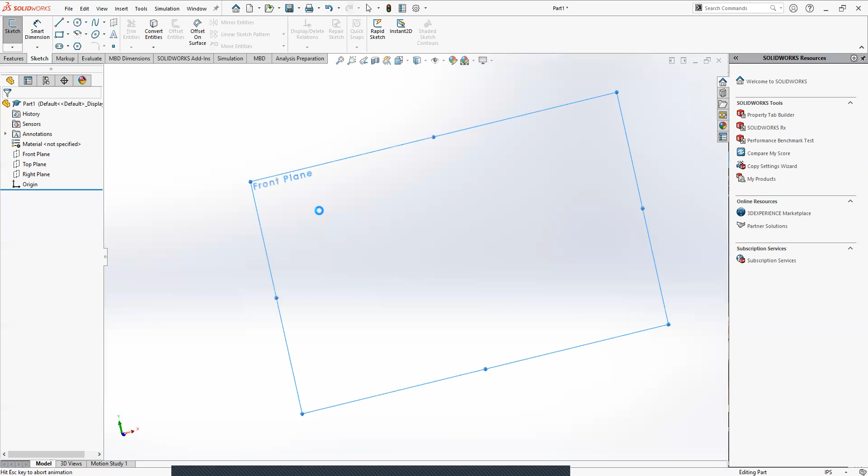Did we ever go over the polygon tool? We've never used the polygon thing yet in Sketch, I don't think. Perfect, okay, so we'll get to learn a new tool for sketching.

Once you have a new sketch, let's click on the polygon feature. It's in our little group of options for drawing. And we're just going to make a polygon.

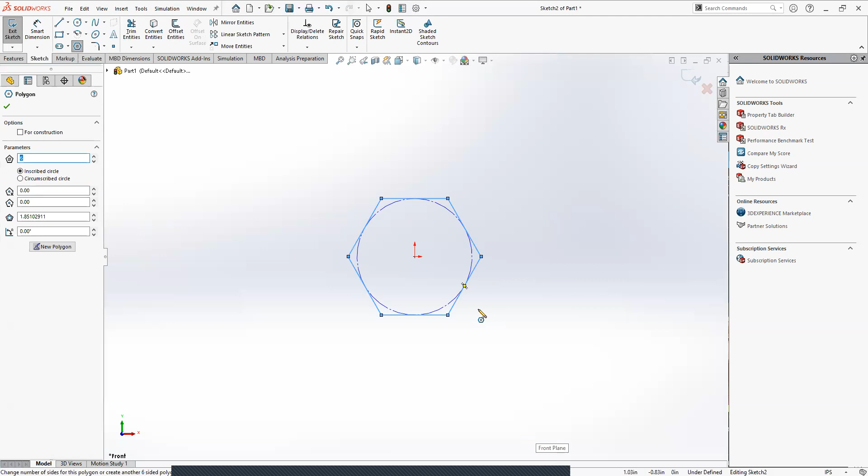So you start by clicking your origin as your center point, and then you can drag out. I want this to be hex shaft like we use in robotics, but you'll see that one of the parameters is number of sides. So I can make this 5 instead and make it a pentagon instead.

But I'm going to stick with 6 for the hexagon. Just wanted to show you that you can actually change the number of sides if you'd like. And I'm going to check.

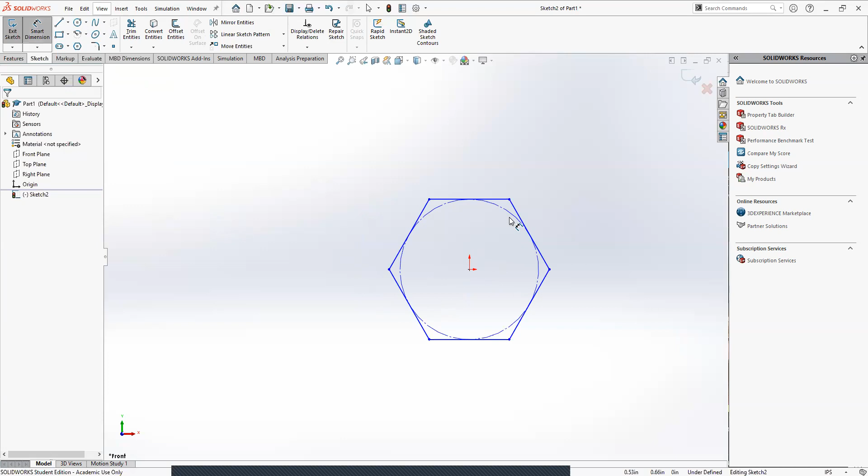After that, we're going to add some dimensions. So you have your hexagon up. Perfect. Do you know the size of the hex shaft we use for the robot?

Oh no, I don't know. You don't know? I don't have a clue, not even at all. No clue? All right, I could be wrong, if I am it'll be embarrassing, but I'm pretty sure it is half-inch diameter.

Wait, doesn't John judge you for messing up? Well, if he's watching this recording and I got this wrong, I'll probably get lit up. No, I don't know if he watches the recordings, but I know I put up one of the challenges and the diagramming for it was technically incorrect. I didn't do the dimensioning, so I didn't care, I was like whatever, it gets the point across.

It was 0.5, half-inch diameter. You can either dimension the circle here, or you could dimension from this top side to this bottom side. Oh, I just did the top and the bottom. Perfect, it does the exact same thing, because as you can see the circle is touching them, so it wouldn't actually matter.

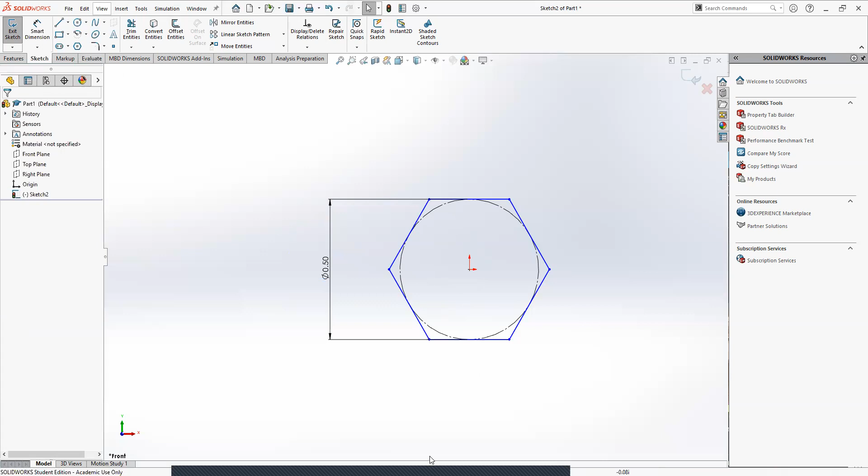Now all we need to do is fix why it's still blue - it's because we could still spin it around. To fix that, let's say we're going to make this point and the origin point, we'll make those two vertical, and now it's locked in place because we can't rotate it anymore. The top point and the origin point, we're going to make those two vertical with each other.

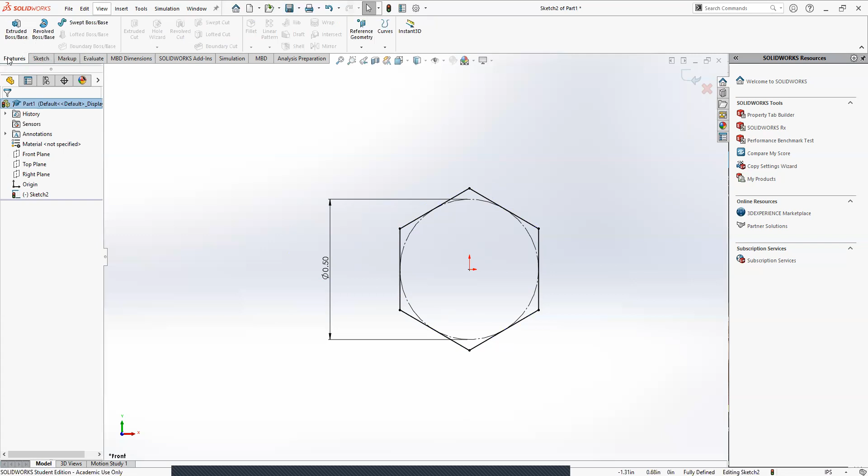Although you actually could technically pick the top and the bottom point as well if you'd like. This will basically just lock it in place. All right, so now we're going to do an extrusion for it.

What do you think is a reasonable length of hex shaft we might use? Maybe like a foot to 2 feet? A foot, yeah, let's go with a foot. 12 inches. Let's do it.

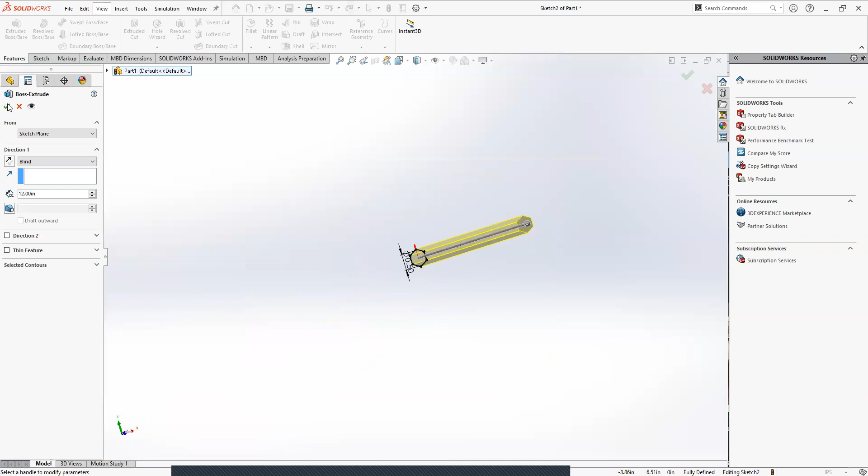Yeah, that looks pretty good. I think 0.5 was correct. That looks like a piece of hex shaft we would use.

Hold on, I gotta do the boss extrude thing. I just forgot, absolutely. Hold on.

Oh my God, are you all ready? Yeah, give me a second. Okay, sure.

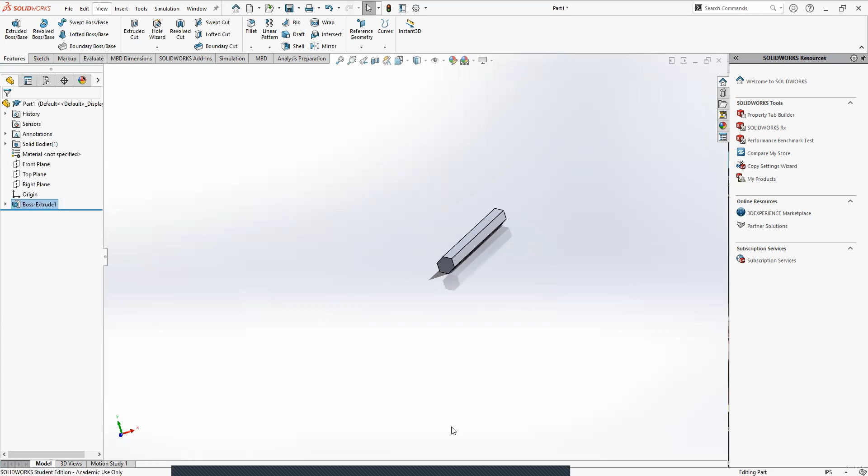Okay, so as you know, a lot of times when we're doing hex shaft, sometimes we'll drill and tap holes into the sides to put in screws, to lock it on with a washer. I don't plan on showing it this class, but there is actually a way to do tapped holes. For now we're just going to say maybe we drill the hole into both of the sides. So we'll pick a side and start a sketch on it.

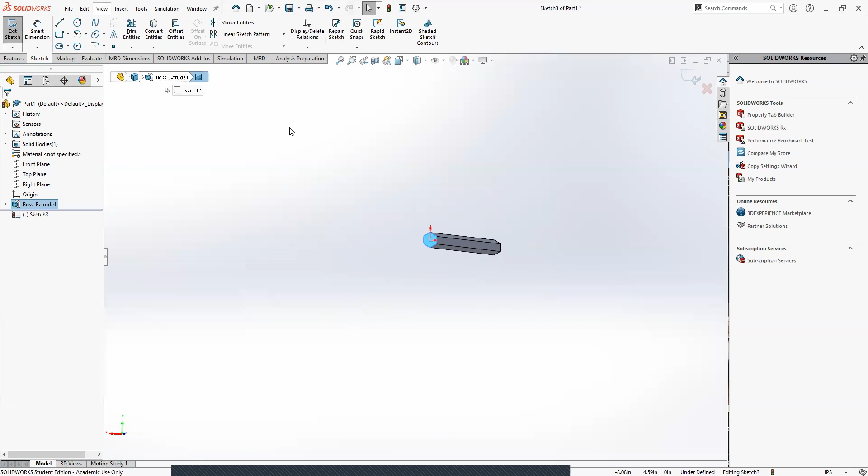Do you click the side first and then click sketch? Or click sketch and then the side? You can do it either way. I usually click the face first and then sketch, but it actually does just work either way.

Now, do you know what size hole you're supposed to drill if you want to tap with a 1/4-20 tap bit? This is a really mean question, I don't expect you to actually know this, but if you do, it'd be really cool. You know how if I drill a hole to tap a 1/4-20 screw, it would be just too small, because then we tap it and cut the threads, right?

Sometimes we'll drill a hole and then tap it to make threads. Do you know what I'm talking about, or no? If not, I can explain it a bit more. Wait, can you explain it actually?

Sure. So let's say I wanted to put a screw into one of these faces of the shaft, just to maybe put a washer on it or something, to hold stuff on. The first step is I would need to drill a hole for it. After that, you know how we have the little tap bits? They have little threads on the outside and you twist them into the hole to cut threads.

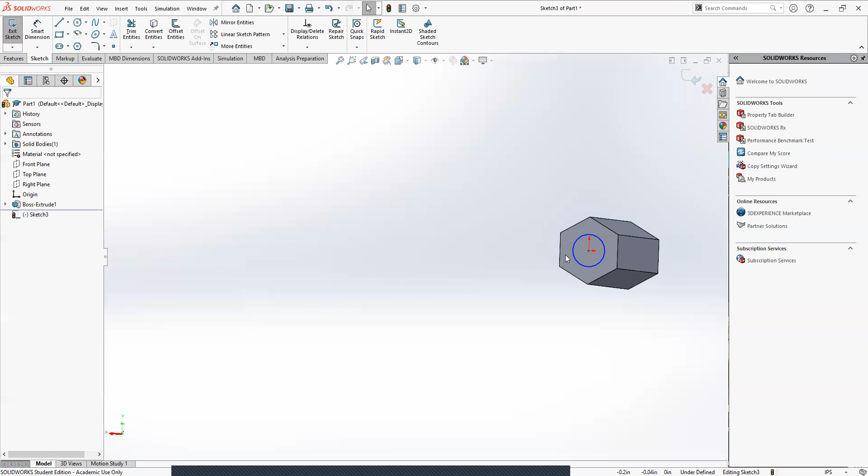Did you ever get to do that, or no? No, I don't know what that is, if I'm being honest. Oh, okay, you might just not have been around when we were showing people that. It's okay, don't worry about it.

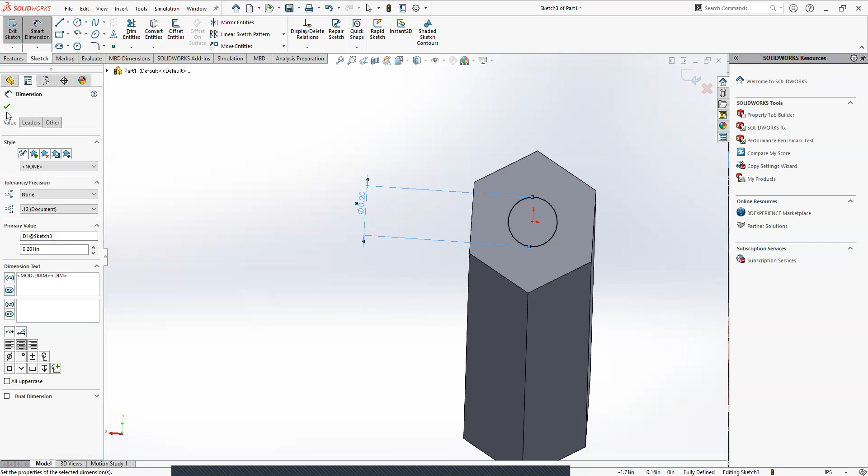But it's something we do. The answer to this little quiz question, for anyone watching online, is normally your tap drill size is going to be 0.201 inches. So if you want to make that circle 0.201, or just 0.2, whatever you'd like. That was meant to just be a little quiz question, I was curious if you'd know, but it's all right, don't worry about it. Just make that circle and then we'll make that a cut.

How deep do you want the cut to be? We don't want it to go all the way through, because this is meant to just be for a smaller bolt. What do you think? Oh, hold on, I'm still making the circle. All right, sorry for rushing you. Just let me know when it's okay.

You did it 0.2? Yep, 0.2. I put 0.201 because that's the exact size, but 0.2 will work just fine. Actually, I'll just change mine to 0.2, that's a nice round number. We'll do that. John gets angry at me, he can get angry.

How deep do you think this hole should be? Because we want to have one on each side, and this should be big enough for, I don't know, a small bolt. How deep do you think would be reasonable? Oh boy.

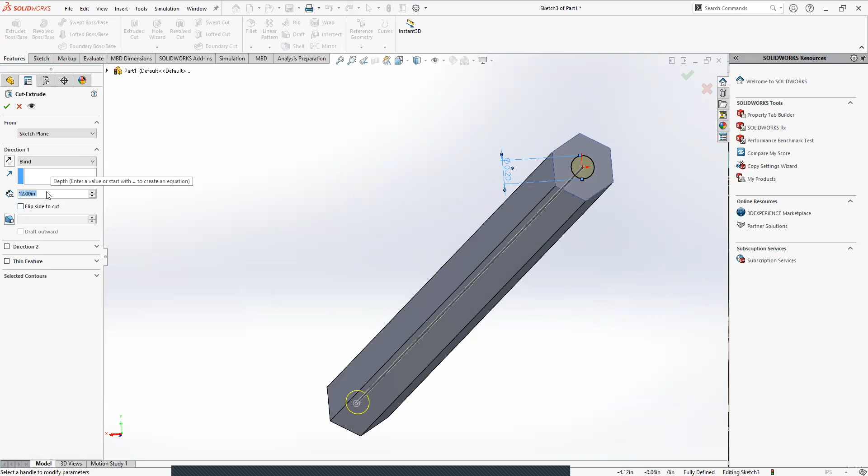We don't want to go all the way through. I don't know how long it is - wait, it's 12 inches, a 12-inch beam. We want a small hole on this side and a small hole on that side, deep enough to get a screw in, but not too deep, because drilling into the material makes it weaker. I don't know, like half an inch?

Half an inch, sure, let's see how that looks and determine if we like it. Yeah, I don't see anything wrong with that. Oh wait, no, I meant an inch. I meant an inch, yes. I think an inch is definitely good, that's a decent distance. Although honestly, I meant to say an inch. I think half an inch could work too, it really depends on what you're trying to do. But I think half an inch to an inch, somewhere in that range, is probably good.

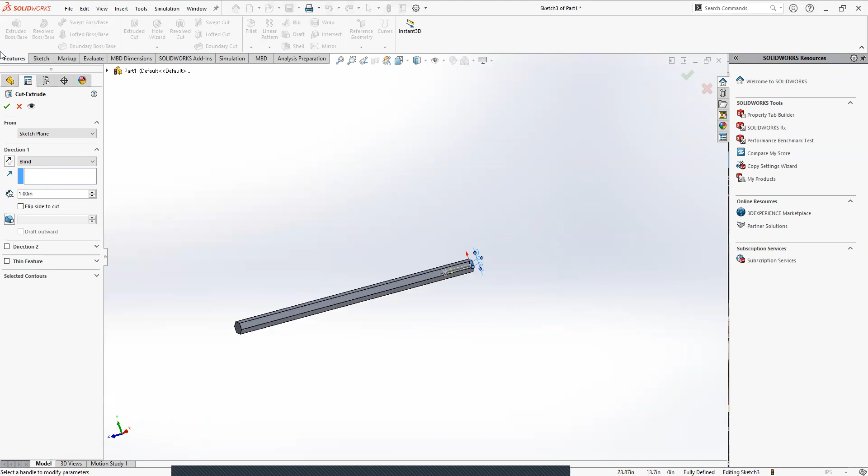Cool, all right, so we'll do an inch on that side.

Now we also want a hole on the other side. I'm going to show you a quick trick where we can reuse this hole and put it on the other side. I showed you guys how to do the mirroring, right? Yeah, I think you did. Do you want to copy it that way or learn a new way? It's up to you, we can either practice the mirroring or... it doesn't matter to me. All right, let's do the new way, because if we wanted to redo the mirror, we could just check the last video. You can always check your parts - those are good notes.

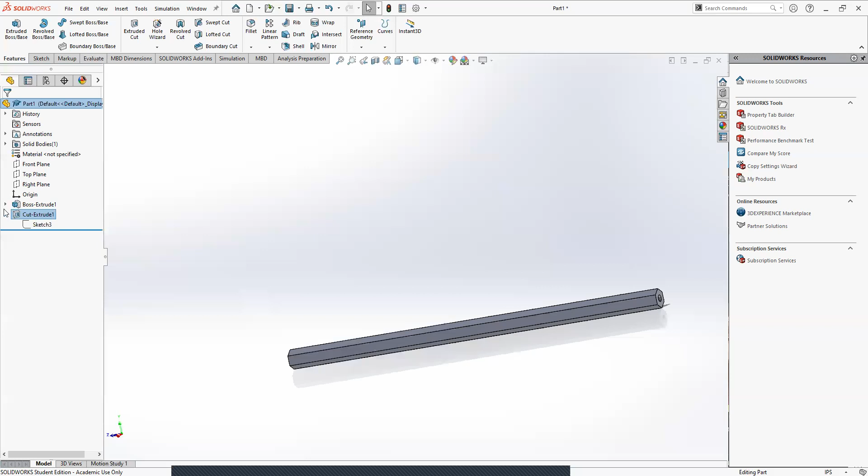So one thing we can do is use this drop down on the cut we just made - we can still see our sketch, right? Which is our little circle here. Now here's what we're going to do: we're going to select that sketch, have it highlighted, and click extruded cut again. Don't worry, it's not crazy.

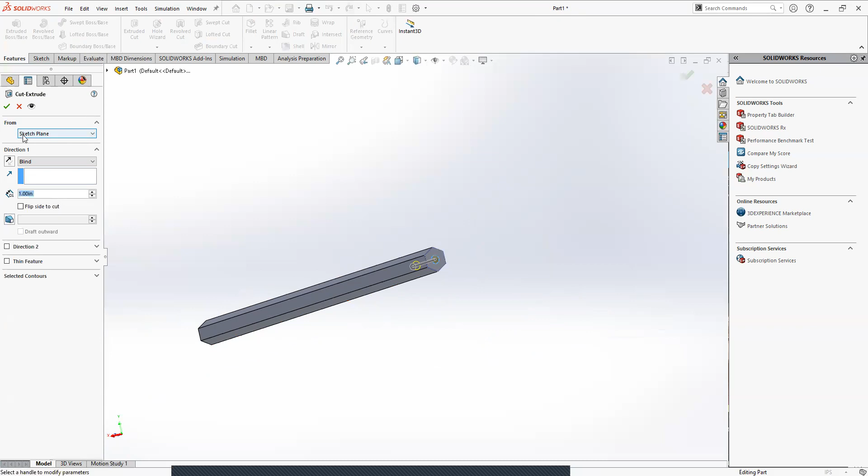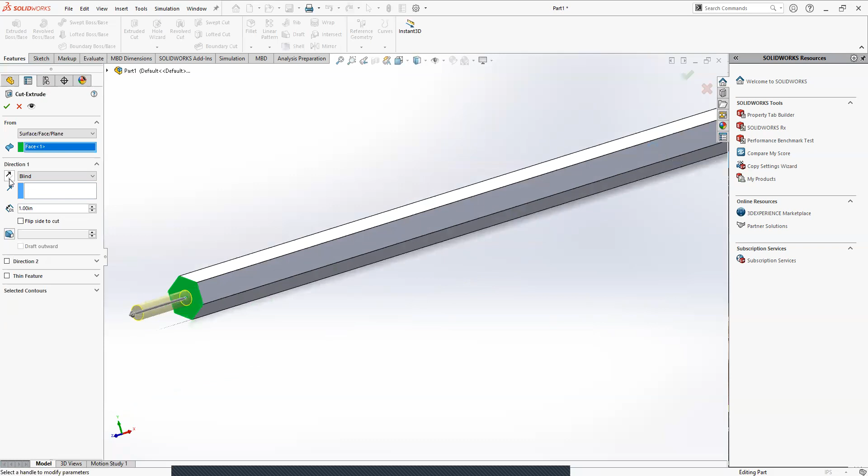Once you do that, notice there's a 'from' option up here, and it defaults to starting from the sketch plane - this is where we're drawing, so it starts there. But we don't have to have it start there. If we select surface slash face slash plane, we can select a different spot for it to start. So I can have it start on this side instead. Now if I just flip my direction here, it's a hole on the other side going into the rod.

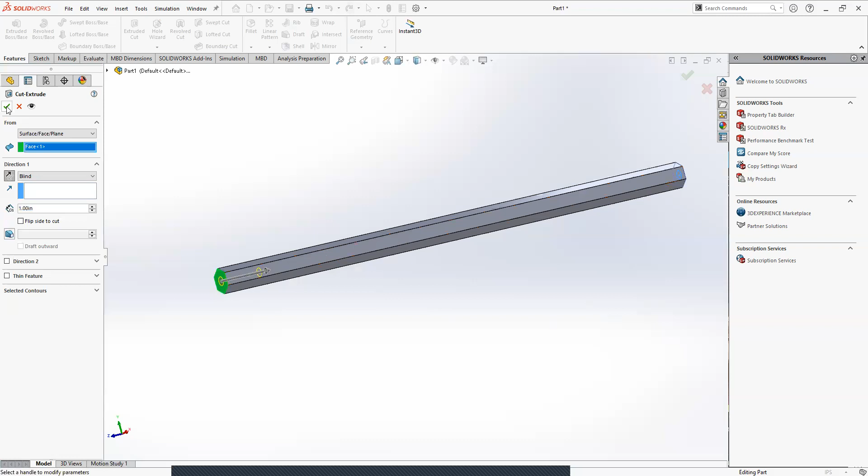Did you follow that? Hold on, I can do that again. Yeah, I did follow, I just forgot how to flip to the right. Oh never mind, just click those arrows. Okay, I got it. That's another thing you can do if you don't want to make a new sketch but also don't want to set up any reference geometry - a cool little way to do it. Yeah, that's pretty easy, you can reuse your sketches, which can actually be kind of useful sometimes.

All right, and that's honestly all I wanted to do for our part, so I'm just going to save this.

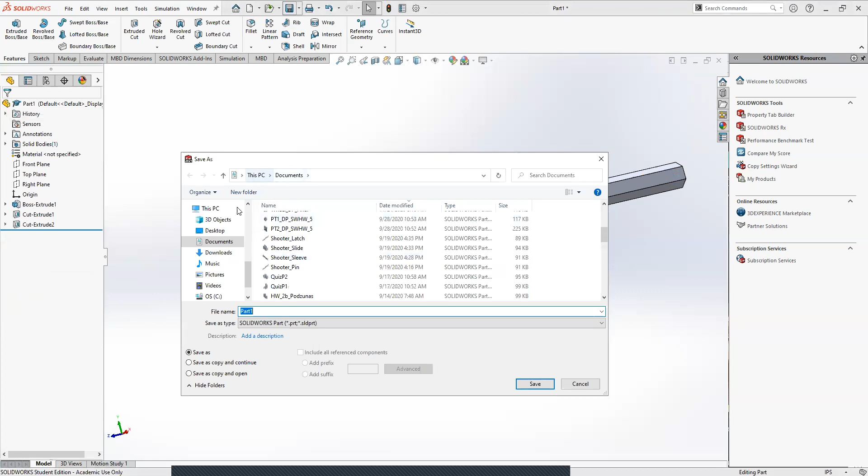Class notes - that would be, this is lesson 8. We're on lesson 8 already, this is crazy. I think by contract I only have 8 more, or 2 more lessons.

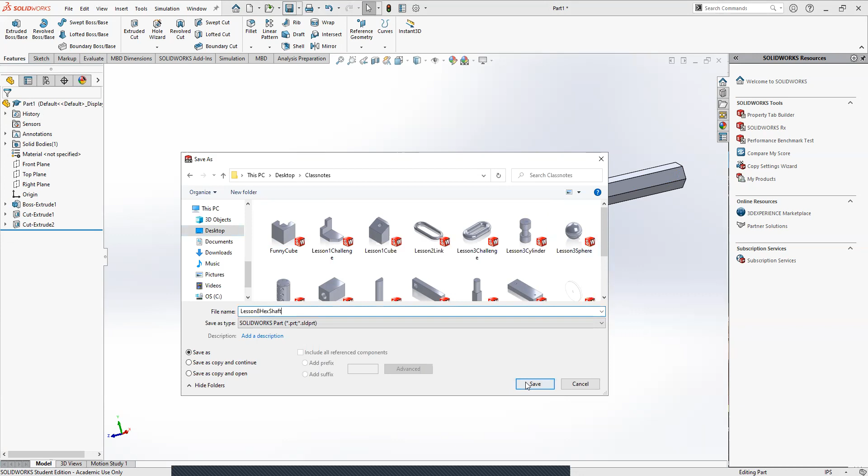Oh really? Yeah. So my plan right now is this lesson will finish this part and the drawing. Then next lesson I'd like to cover basic drawings as far as assemblies, like how to make a drawing to show someone how to put something together - and we can use the assembly we did last class for that. Then for the last one, I'll either talk to John about doing a drawing session, or I might...

Or if he wants to do that a separate time as his own thing, we might just do a more in-depth dive on some parts, because there's a few more features I haven't taught you guys about, like Hole Wizard, which is really cool, or Swept Boss and Base. I'll see, the last one's kind of up in the air as far as whether John's teaching it, or maybe I'll do a session on some really cool drawing tricks I haven't shown yet. We'll see, not sure yet. But yeah, we're just gonna save this part and then make a new part.

Or not a new part. We're gonna make, if you go up to this little paper icon, it says make drawing from part slash assembly. Go to the paper up there, there's a little paper that's folded. If you click the drop down, there's an option to make drawing from part and assembly. We want to make a drawing from this part, so let's click on that.

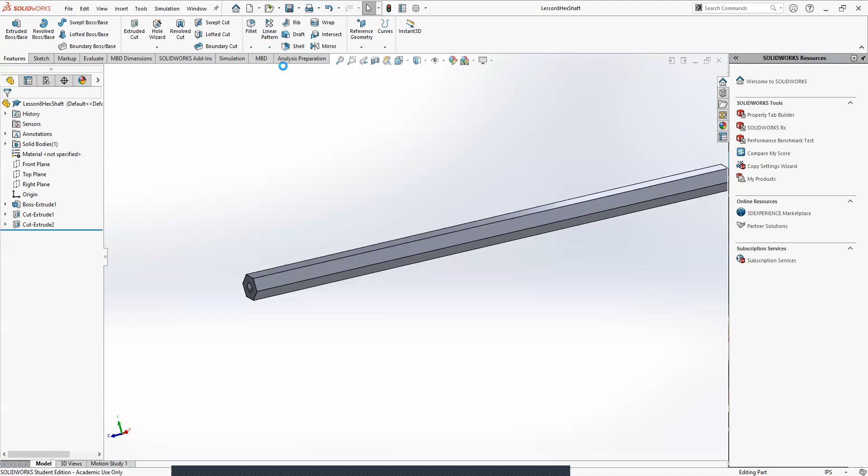And let's do a B-sized drawing paper this time. So we'll do B ANSI landscape. Okay, hit OK.

As you can see, because we told it that we wanted to start with our part on the right side, it has different views that we can drag onto our drawing sheet. I'm going to start with the front view of it, drop that down. All right, and then, I'm only going to do, or yeah let's also do, hold on, I'm going to delete all this, I'm going to redo this.

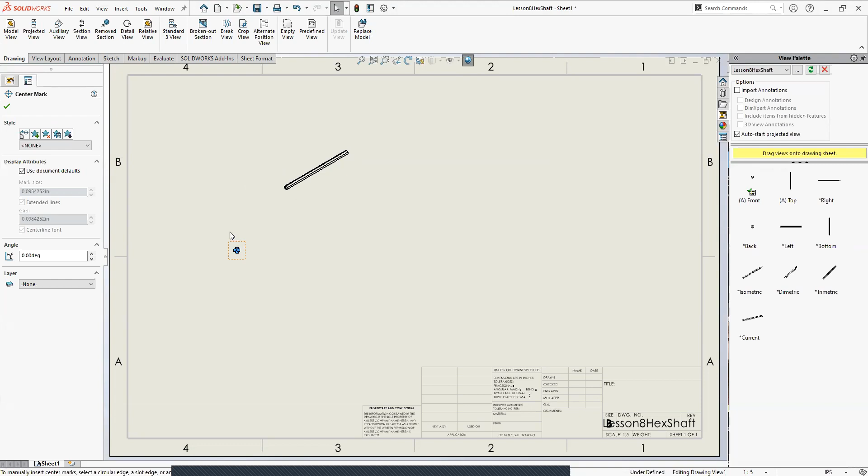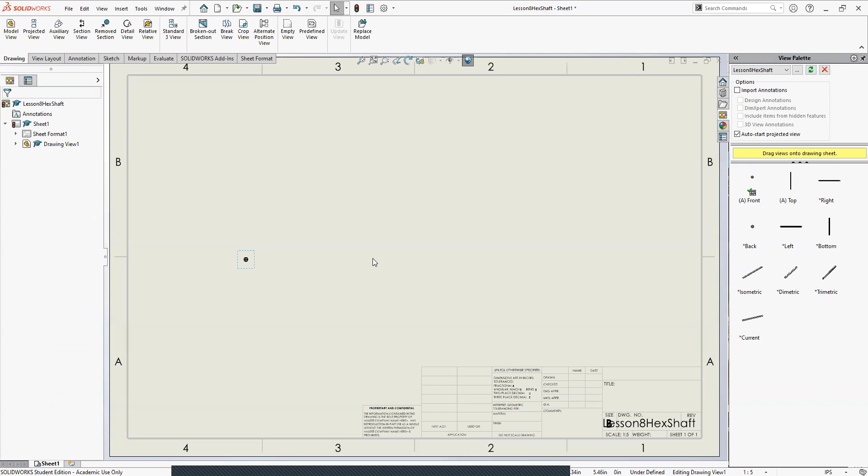Just for simplicity's sake, so what we can do is we could start with the front one, right? And now what we could do is, yeah, my thing on the side like went away. It vanished. Okay, I tried to bring it to the thing, click on it, and then it just vanished. Totally fine, all right, so let's do it the normal way then.

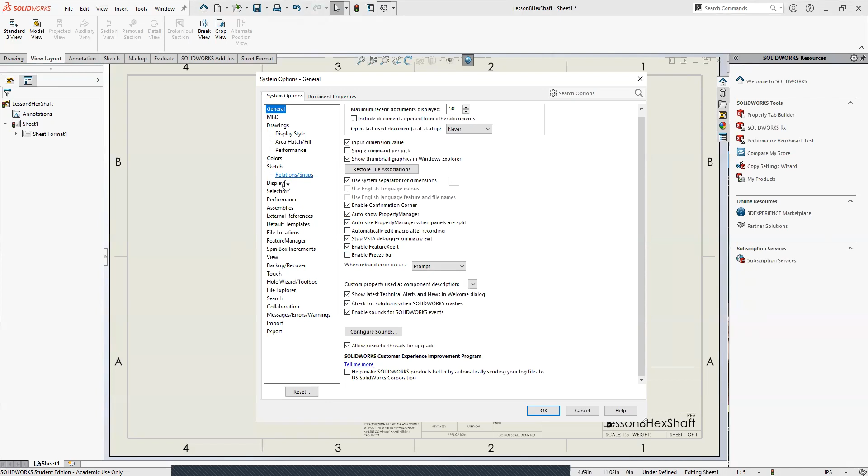So what we'll do is we'll do drawing. Oh I'm sorry, because you don't have the view layout tab, right? Nope. Hold on, I wanna just do a quick look into if I know how to. Yeah, I am unfortunately not immediately sure on how to do that.

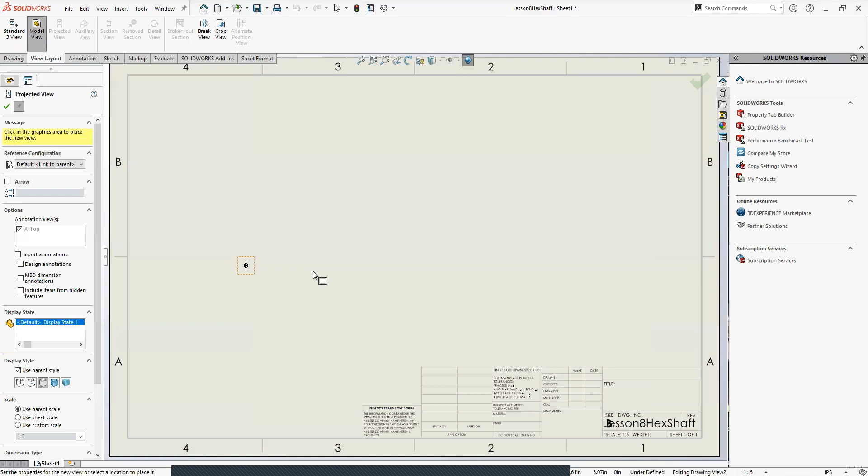But the other way we can do it is we can go to Insert, Drawing View, Model, and do it that way. Then we'll click on the part we want, which is in our case the hex shaft. I'll do a front view, and then if I just don't exit out yet, don't hit escape, I can drag to the right to make a side view, and I'll drag diagonally to kind of make an isometric view. And then I'll hit escape to kind of escape out of it. Let me know once you have that all set.

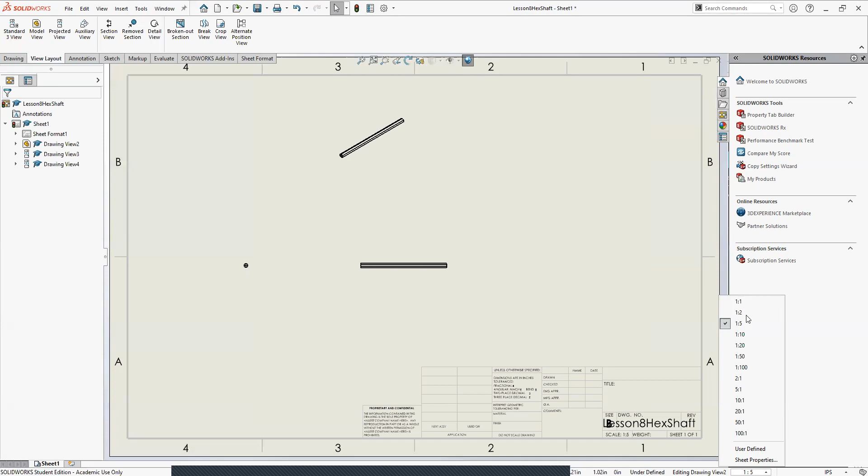All right, I'm good. Okay, and you can see right now it's scaling at 1 to 5. I want to see how it looks if I scale it to 1 to 1. So down in this bottom right area, I'm going to click on it and change it from 1 to 5 to 1 to 1. As you can see, it's, where? Right down here, I don't know if you can see my mouse, but kind of bottom right area. You'll see something where it's like, oh yeah, it'll kind of give you like a ratio. Wow, so I changed it to 1 to 1.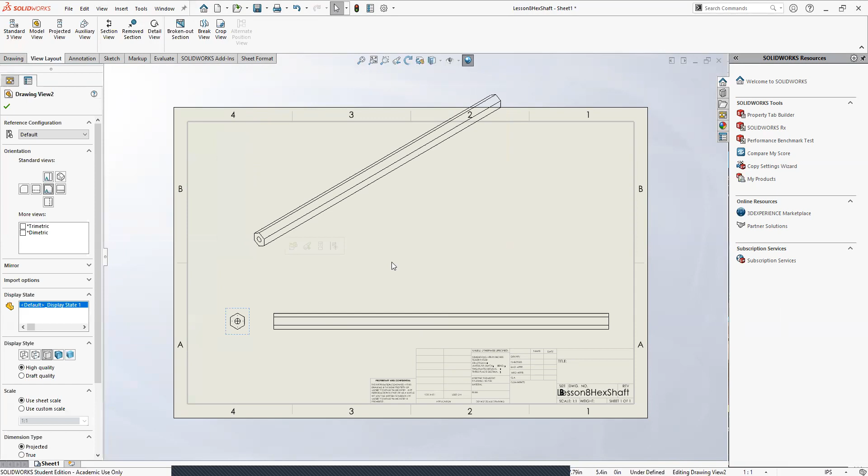But as you can see, I mean it does kind of work. And one thing to note from my experience, this isometric view, it's usually okay if you shrink that down a little bit compared to the other two. So like these, you want to have the same scale. Like all of your normal views, you want to have the same scale. Like if this is 1 to 1, this should also be 1 to 1, and any other view from it should also be 1 to 1. The only exception is your isometric views. Those you can set to something different.

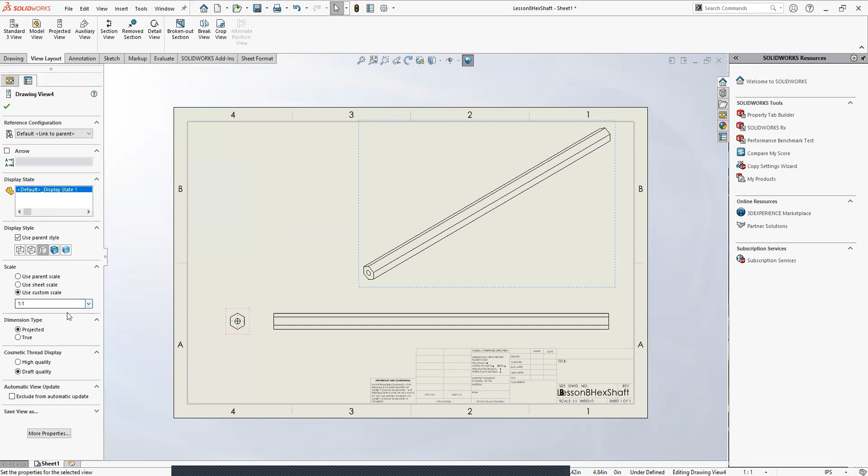So I'm going to click on it, and there's an option for scale. I'm going to choose use custom scale, and instead of 1 to 1, I might make it like 1 to 2, and then kind of just put it up in my corner over here. Because the reason why you can do that is your isometric, it isn't really there for any dimensions or anything like that, it's really only there just as clarification, I guess, just so you can kind of see the whole thing. Yeah, exactly.

So we're able to shrink it down if we want, which I'm going to do. So let's do some stuff.

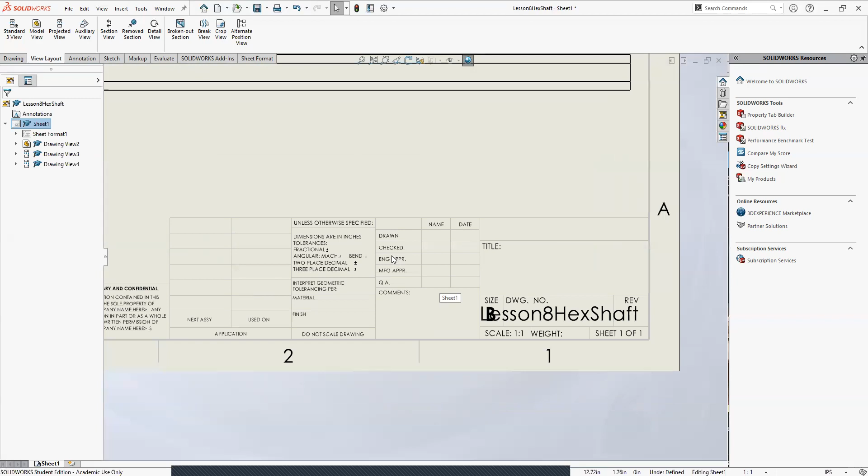First off, here's a good example of when notes can be useful. So we haven't really discussed this box area down here. Now, a lot of companies I've worked at will have their own format for this box, so I don't really use this one much. But essentially what this is useful for is just giving some more information, like drawn, checked, engineering approval, manufacturing approval, quality assurance. These won't really apply to us.

This is if you're working at a company and you need a bunch of approvals. Maybe someone checks it before it gets sent to getting machined, like maybe John might check it. But in general, we probably won't use these boxes too much. It might be nice to put your name here.

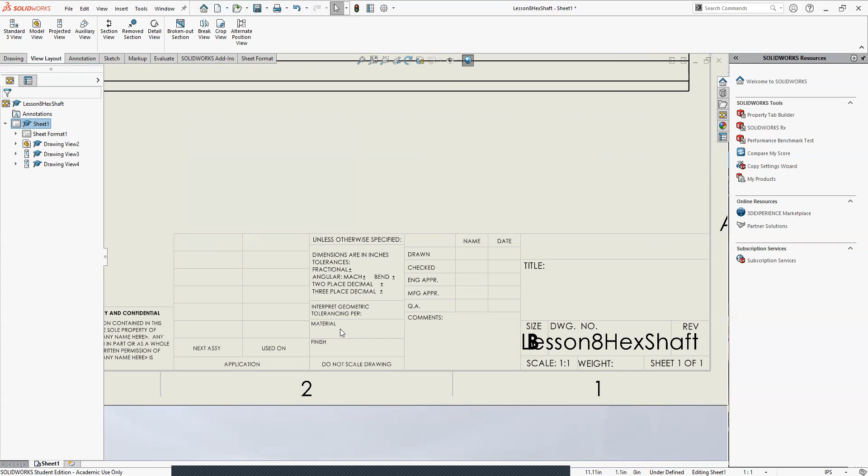Materials, kind of important. We mostly work with aluminum, right? But it can be important, especially if you want something that's not aluminum, just to let people know, hey, here's what material I want.

I don't really plan on talking about tolerances, I'll be honest. I think it's a little bit beyond what we'll really need to do in robotics, because unless John's making the part, I don't think we can really expect super tight tolerances, just because it can be kind of difficult, especially with the equipment we have. So I'm probably not going to cover tolerances.

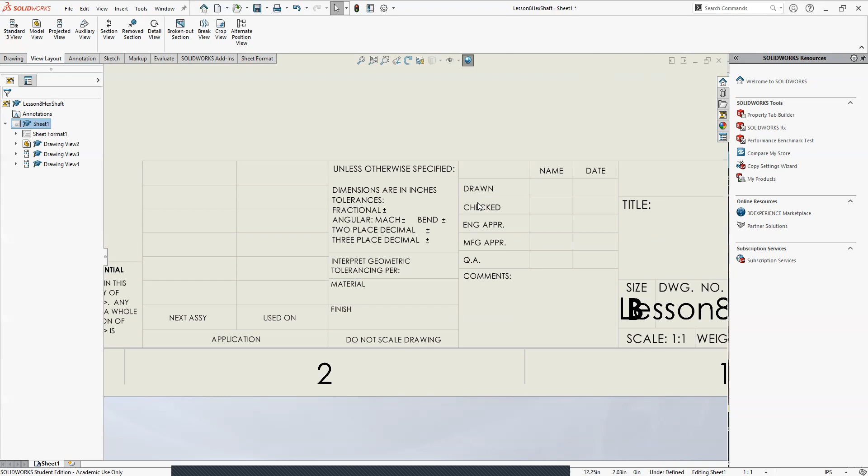I'll let John know about that, so when he's doing his drawing thing, if he wants to teach you guys, he can. But I don't think it's super relevant to a lot of the work we do on the team. I think it's a useful skill, but I'm not very good at it, to be completely honest. I know the basics, but between me not being an expert in it, and I'm not sure if you guys would really need to use it for robotics, I'm probably not going to cover it, but it is a useful thing.

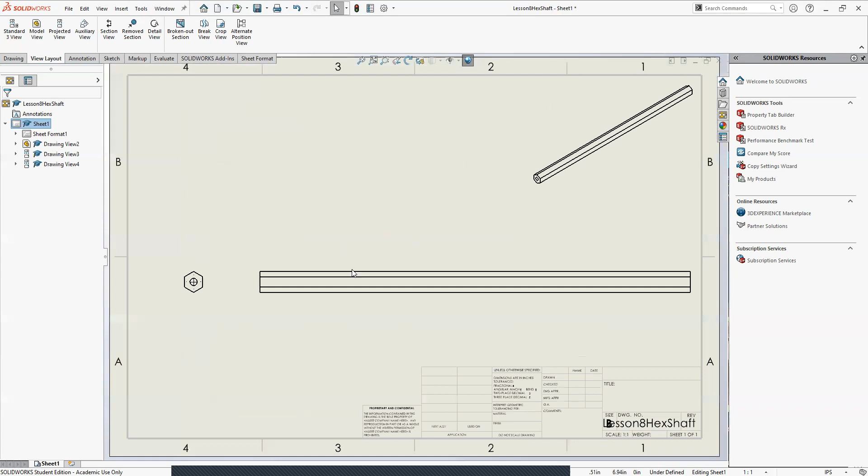So here's kind of a decent example of when you might want to use notes. If I go over to annotation, I could do a note, maybe pointing to here, like my piece, and I might just say, hey, this is 1/2 inch.

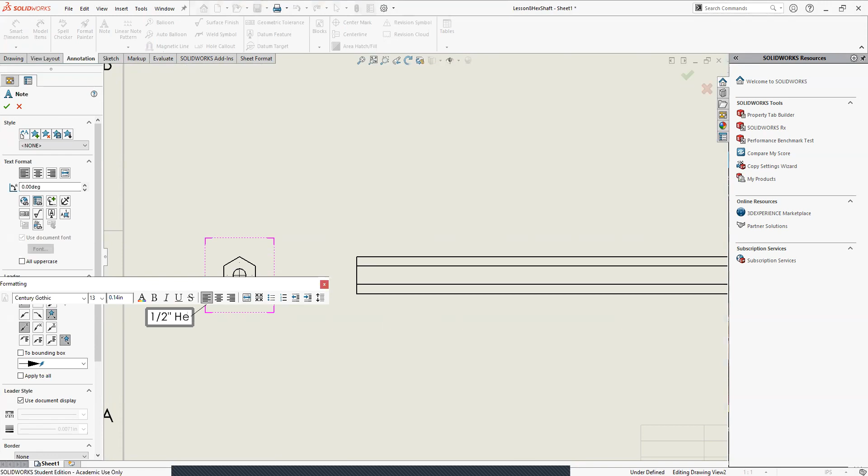And then inch is 2 apostrophes, hex shaft. I might just say that because in our shop, if I wanted someone to make this part, I wouldn't be expecting them to make the hex shaft, right? I wouldn't be like, oh, take this cylindrical rod and turn it into a hex shaft. No, we're probably starting with hex shafts.

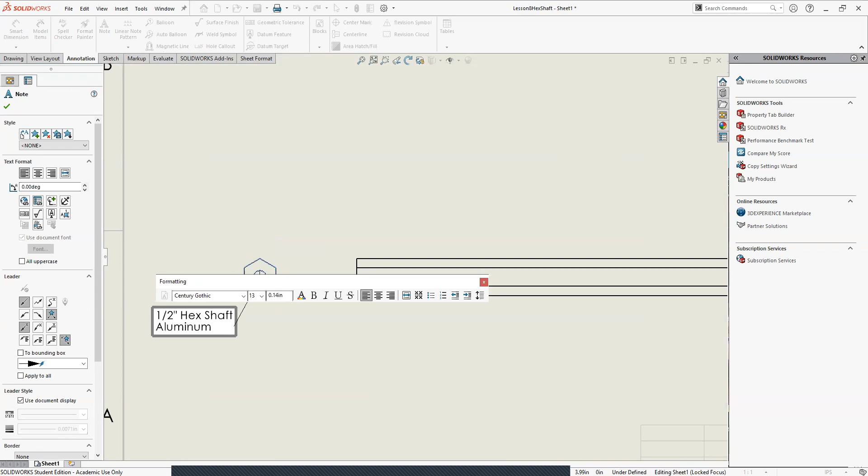So maybe just adding a quick note saying, hey, look, we're using 1/2 inch hex shaft. I might say aluminum here. Normally you would put that in the materials section, but I'll just leave it as 1/2 inch hex shaft, right? Because that's what it is.

Does that make sense? Because I don't want them to actually machine the hex shaft. That would be really, really... Right, and it would just be really hard, right? Right.

I wouldn't feel confident making a hex shaft myself, so... but I'm also not very good at machining. But if we did want them to make the hex shaft, maybe, right?

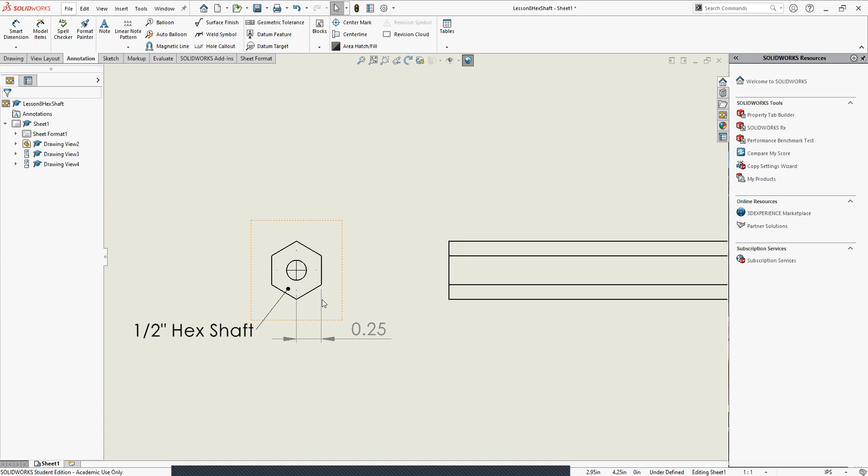Let's throw in some dimensions they might want to use. I know if I were to do it, one thing that could be useful is the distance from here to the center, kind of giving them the quote-unquote radius, because that will give people an idea of how far down each of these flats are from the center, which could be useful for machining it. The other thing that might be useful is knowing the distance from the center to one of the edges. Oh, but it's not letting me dimension that. Hold on.

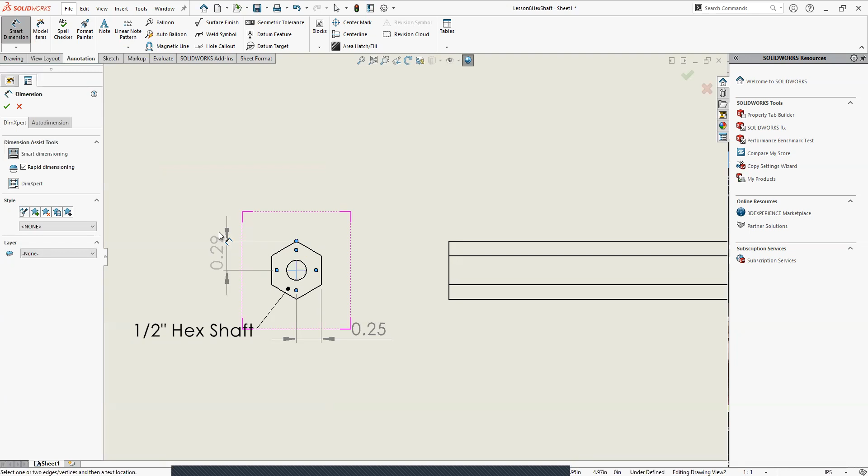I'm just doing it in a bad order. Click that. Click this. There we go. This might also be a useful dimension. Because in my head, if someone asked me to make a hex shaft by hand, I would turn down a rod to the size of these outer edges, and then mill down flats in each side, that would be this deep. That's how I'd make it. I don't know if it's the best way, but this is how I would dimension the hex shaft. Does that make sense?

No, it makes sense. Okay, another thing you might see, and these are pretty sure the only dimensions you'd actually need to make this hex shaft. I could be wrong, but geometry wise, these should be the only two you really need.

But one other thing you might see people do is they might just say this face here is this. A notation you might see is if I ever have a dimension that's the same a bunch of times, like each of these faces are going to be the same size, so what I might do is say that dimension and then times 6. That way the person making this knows all 6 of these sides are going to be the same size. That might be something you see as well.

That makes sense. Or maybe if you're having someone drill 5 holes for you, you'd want to tell them where each hole is, but you might not want to dimension each hole to be 0.25 inches every single time. Instead, you might just give the diameter of one hole and say 0.25 times 5, letting them know all 5 holes are 0.25 inches, if that makes sense.

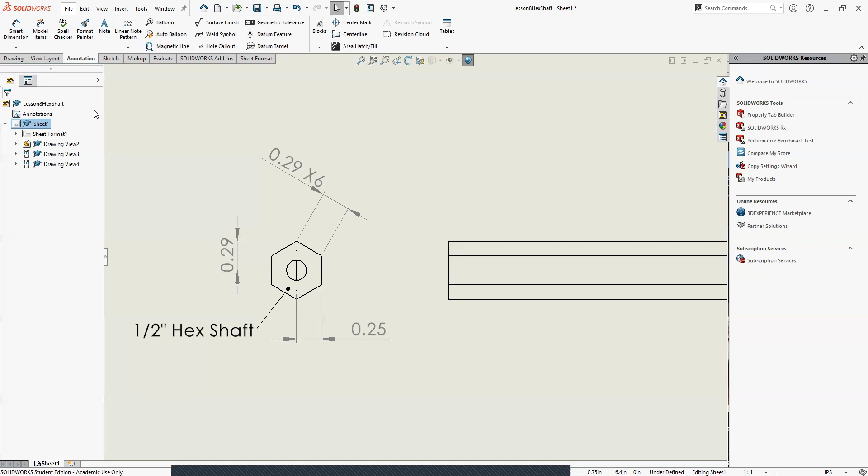I think holes would actually be a really good example for drawing this. I probably should try to fit an example for that in at some point. I'll see if I can fit that in next class because I think that would actually be really useful.

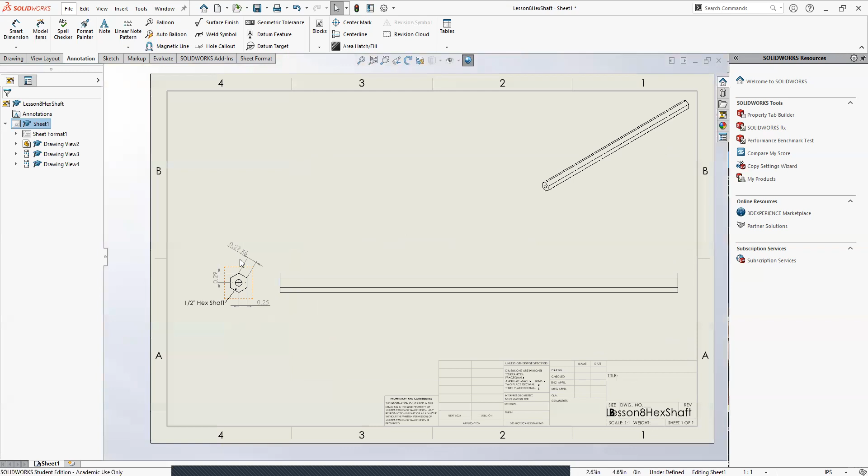So that looks pretty good, right, as far as the actual hex thing. Another dimension I could add is the diameter of our circle or hole, so I might put it at a bit of an angle like that. Yeah, that looks pretty good. I'm okay with that.

And that's all you really need, right? Oh, I guess you have to do the size of how long the rod is, right? Yeah, that's it, that's why we have this side view. That's perfect, 12 inches. What else do we need? There's one more dimension we need.

Can you tell me it? The size of it, like I don't know, the length of it. Not like the 12 inches, the other way. Do you know what I'm saying? I forgot, like the length and width... the height? Yeah, that's what I meant.

We kind of already gave them that with these dimensions of our hexagon. The hexagon is fully done. The hex shaft is 100% done. I'll give you that hint, we're done with the hex shaft. The hex shaft is good. What do you think is left?

I don't really know. Well, if I told you, hey, here's a hex shaft, I want you to drill a hole that's 0.2 inches in diameter, would you have any questions for me? Oh, you don't have the thing for that. I never told you how deep the hole is, right? That's kind of important, right? Yeah, now here's a hint.

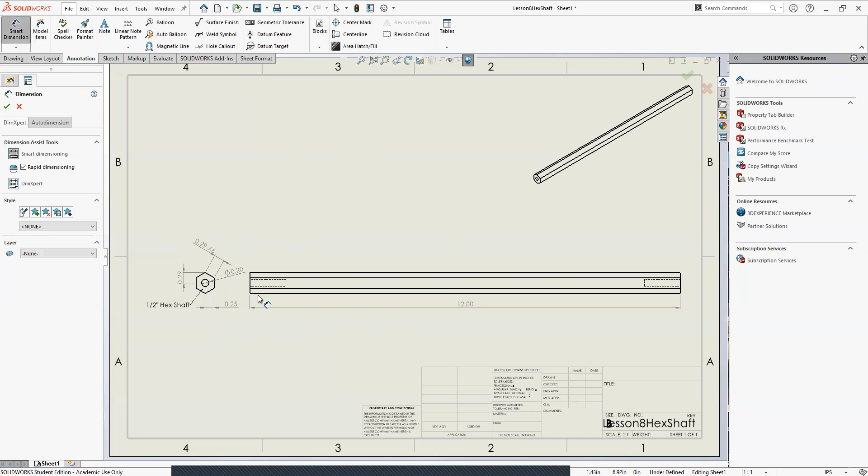I'm going to show you the wrong way to do this because I did it this way once and it was not a good idea. One time, remember how I said you should never dimension to hidden lines? This is an example of where it's really tempting, because look, what I could do is go from here to the bottom of my hole and say, boom, my holes are an inch deep, right? That's so easy. Makes sense. But you can't do it that way, you're not supposed to ever dimension to hidden lines.

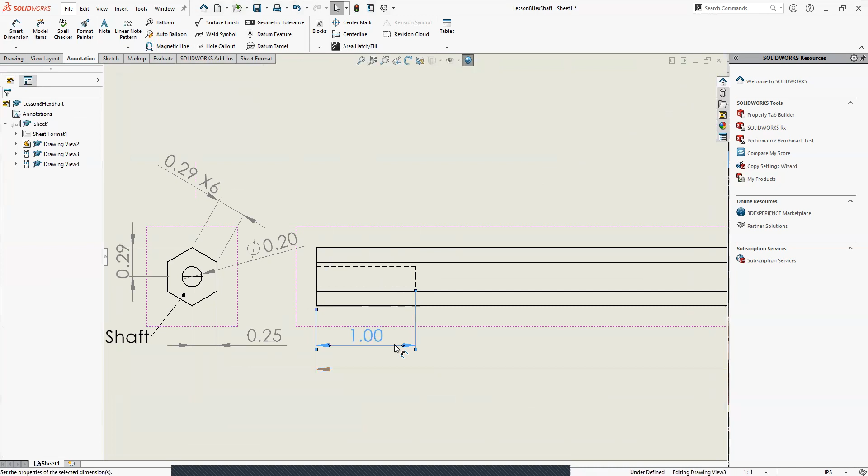So I'm going to show you the way you should do this. Wait, where do you make the hidden lines visible? If you click on the view, there's going to be a display style, and you can click one to the left. It's hidden lines visible, you kind of start in the center and click one to the left.

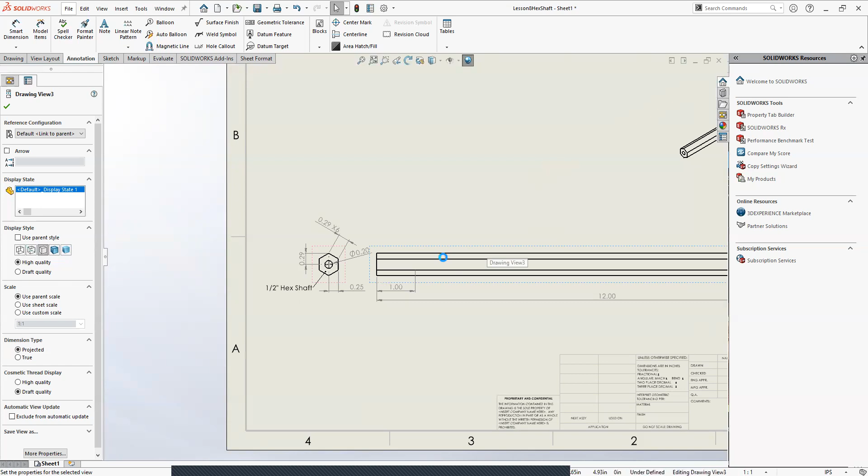Don't dimension to hidden lines, right. So what I'm actually going to do is delete this whole second view here. This one's fine, this one's not. I'm going to delete this one because we need to be able to tell them how deep the hole is. So here's a really, really useful option.

For me, I would go to view, layout, section view, but we're going to do insert drawing view and then go to section view. Insert drawing view and then section view. Super, super useful tool.

Now, the way section view works is it basically gives you the view of the object as if you cut it in half. It almost gives you like a cross section view, if that makes sense.

Wait, I don't know where that is. You said insert and then... Yep, should be there, right? Insert, oh sorry, insert drawing view and then section view. Okay, you have to go to drawing view first.

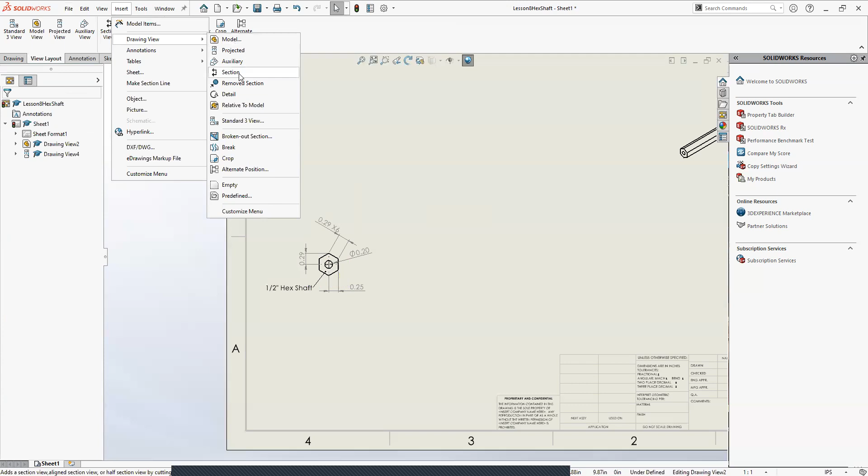So the way section view works is it's a little hard to visualize at first, but it's basically as if I cut this object in half. What we're defining right now is the line that we're going to cut it in half with, and then it's going to show us our cross-section view, if that makes sense.

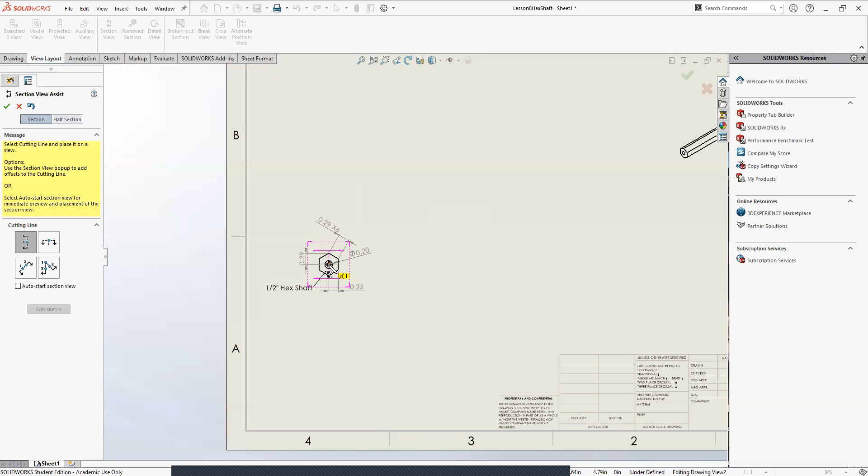So you're putting this thing in the middle? Yep, right in the middle. We want to cut it right in half. And if I hit check... okay, it's going to give us our section view.

Well okay, did that work for you? Yep, cool. Yeah, this whole thing's a little cramped. So what I might do is... I kind of want to rearrange this a little bit just to make it less cramped, but yeah, whatever, we'll just leave it as is.

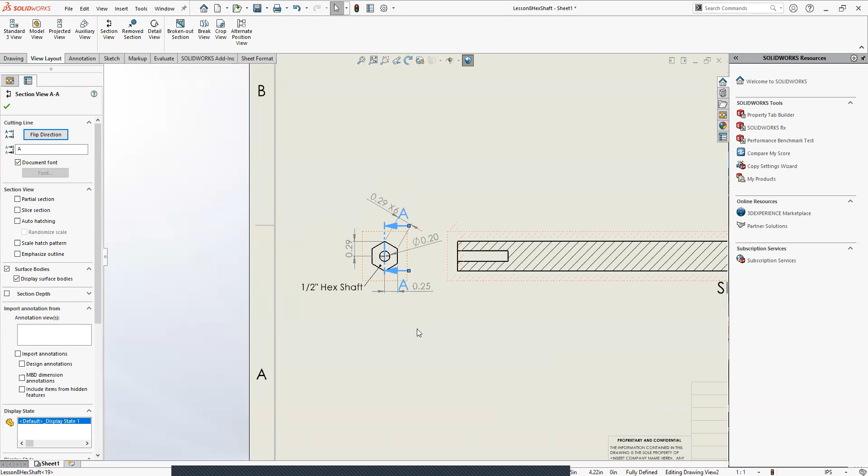But now you can dimension this? Because now look, it's not a hidden line anymore, we're actually seeing the real feature. Basically this grayed out area is like solid area, so this is where we have material. And then the white area is where there's a hole, which is what we were expecting.

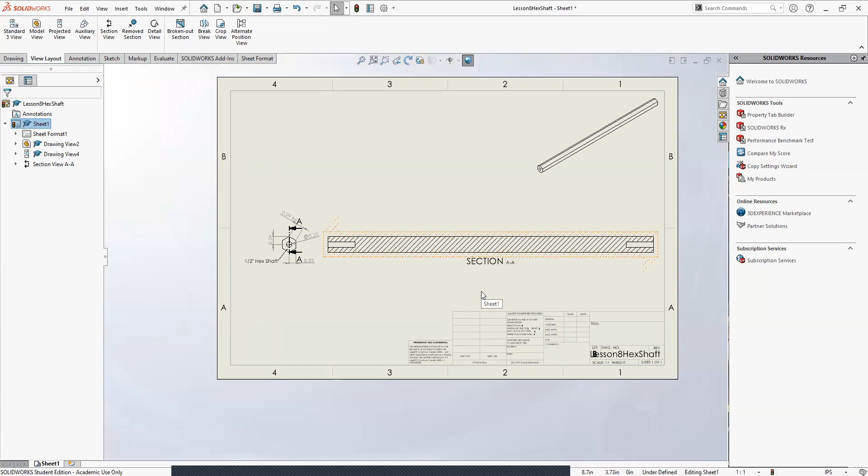We expected a gap here because we wanted to drill that hole an inch deep, and that's what section view does. So basically you can imagine it cut in half along this line and then showed us the cross section, which is here, right?

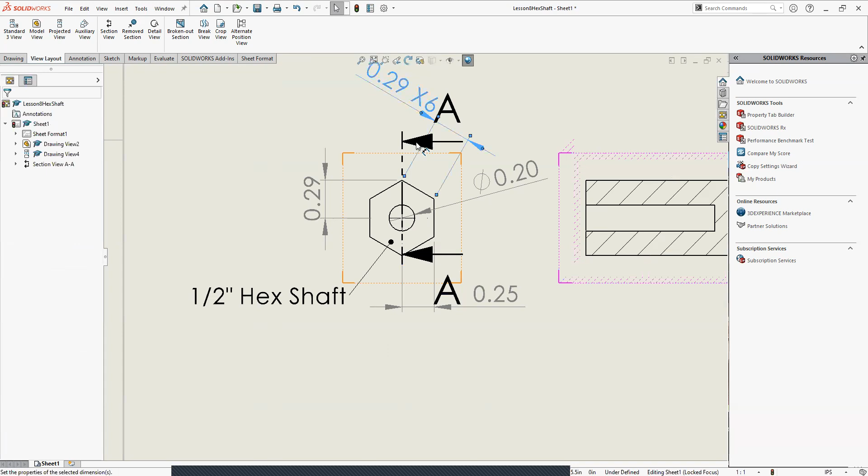And what you can actually see is if I were to... I don't think I'm going to be able to shift this to the left at all. I don't know if I can shift it anymore, but yeah, if I had moved it to the side a little bit, it would show me something slightly different.

But so let's do our dimensioning now, right? So we can give us our length. It's 12 inches. Hold on, let me move this section. I think it's supposed to technically be on the bottom, so I'll do my dimensioning on the top. And then we can add our 1-inch thing here.

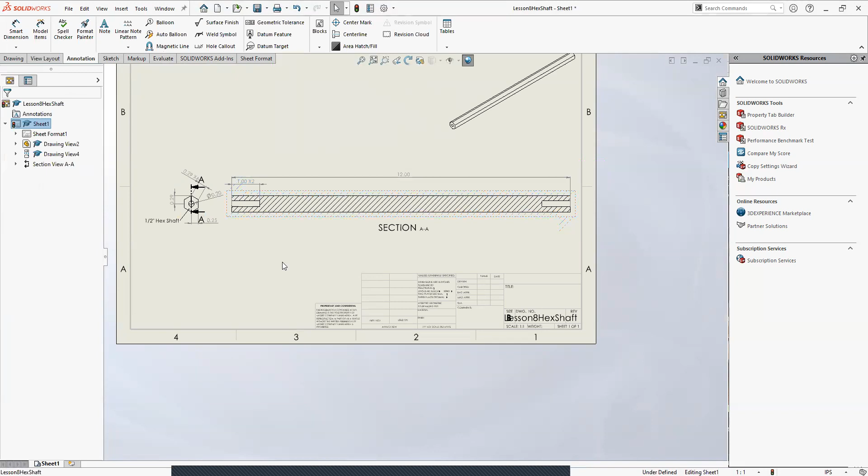And what I might actually do is I might say 1 inch times 2, because both of them are an inch deep. Do you have to do that, the times two thing? You could also dimension each one by themselves. Kind of up to you.

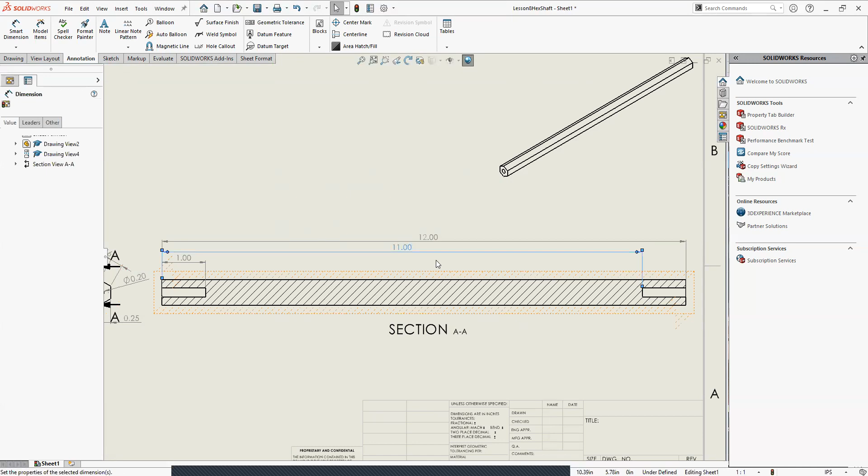Actually, let's dimension each one by themselves because I don't actually know if you're able to do times 2 for lengths. And a lot of times, remember how I mentioned the datum measuring, where you should measure everything from a single point? That's usually the standard way. So even though it would make more sense to just dimension that to 1 inch, a lot of times people want you to go from this side to here anyways, but we'll leave it at 1 inch on that side because I think that's probably easier for our purposes.

I'm just here to try to teach you guys the different tools we have for drawing. I can't promise I'm going to do all my drawings the right way, so that's okay. And just one other thing that can be kind of useful.

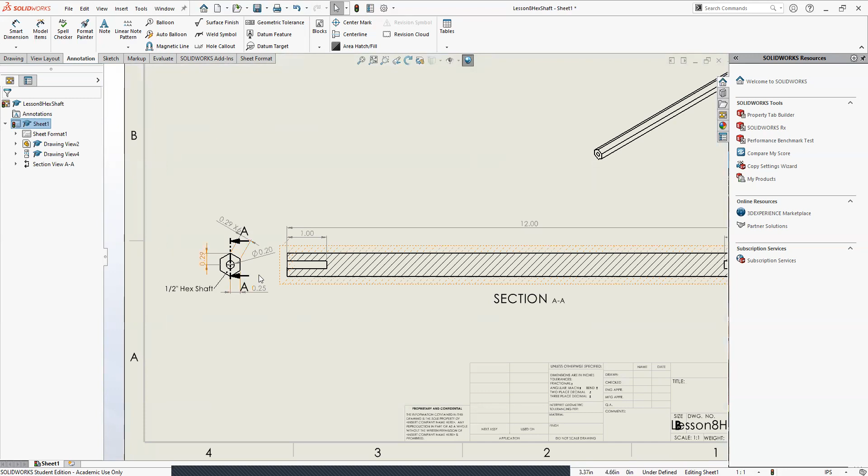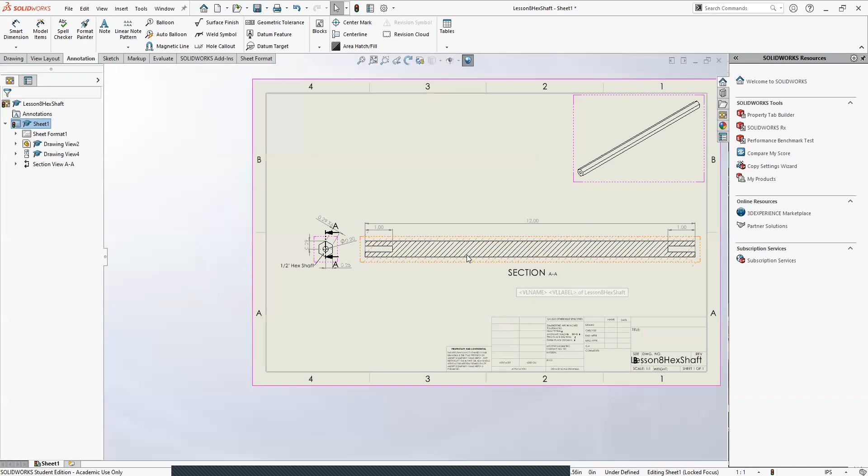I'll probably cover this other tool in the next drawing class, but I kind of just wanted to show section view because it's super useful. Remember, I said you can't dimension to hidden lines, so whenever you're tempted to, use a section view. It's a really, really useful tool. I know when I worked at my internship, it felt like almost every drawing I did used section view because I had so many shafts with holes drilled in them or weird stuff like that. So it's super useful.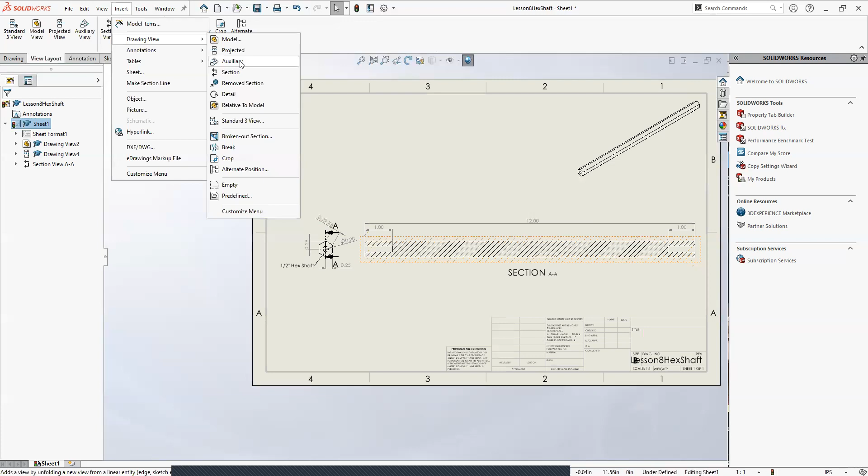One other thing I'll touch on now: there's also a cool thing called detail view, which I've used a bit. If you go to insert, drawing view, and then detail, it'll give you the option to basically draw a little circle.

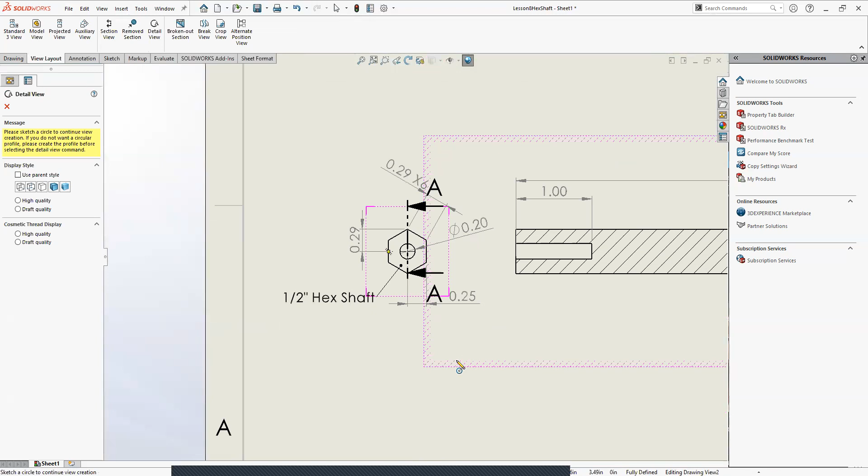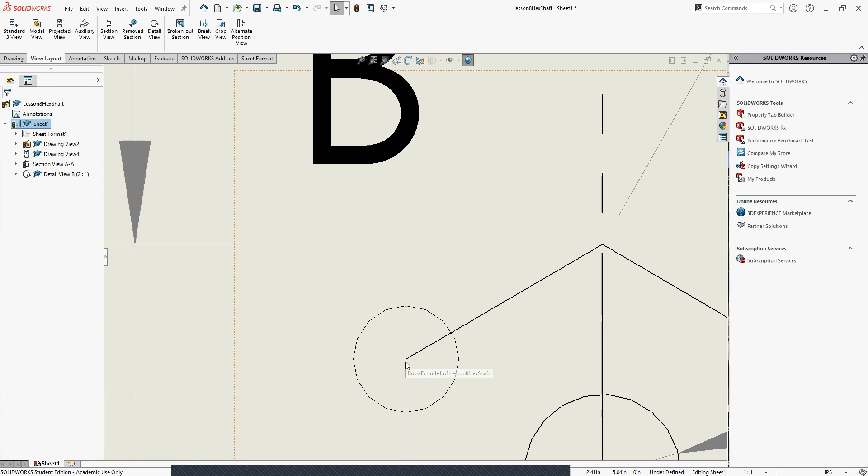Let's say I drew a tiny little circle on this corner here. Now you can see how our circle is basically just looking at this part of our hexagon. Maybe there was really something special about that corner. What we can do is a detail view, which lets us circle that, label it as B, and then make a detail B. We can make that scale up, even like 5:1, so now it's like a zoomed in version of that piece.

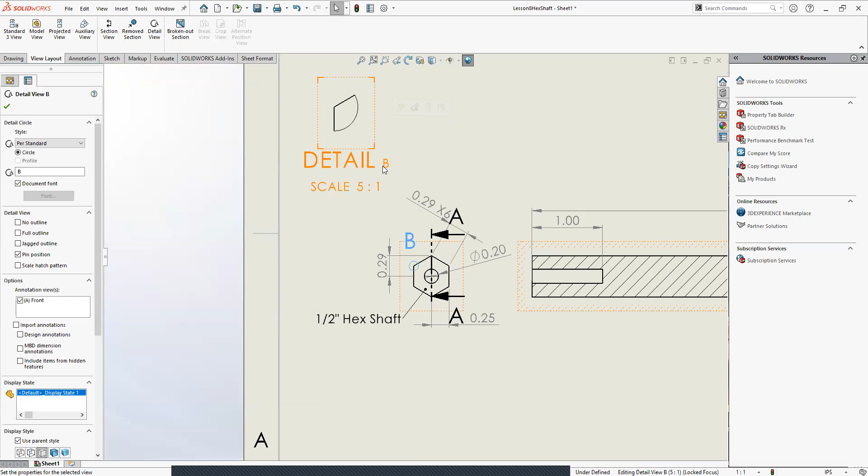I'll cover this more in detail next week, but I just wanted to show it. So I'm going to delete this for now because it makes it kind of cluttered and I don't really like it very much.

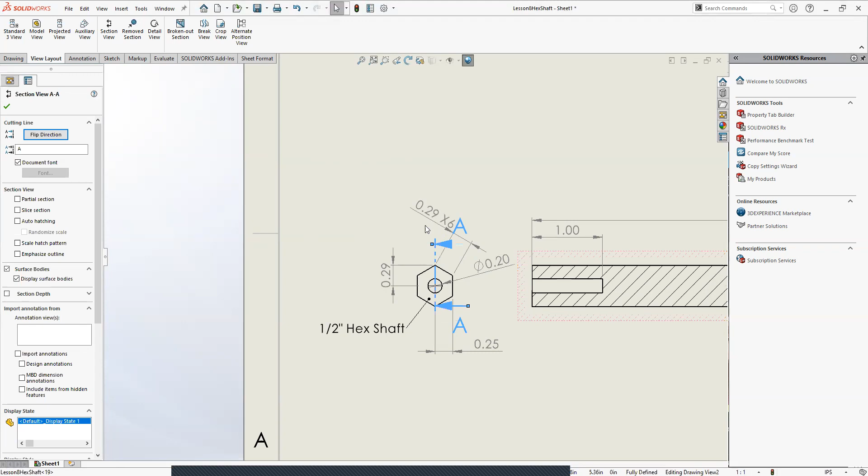But yeah, it's also a pretty useful tool. I kind of want to move stuff around until it looks good because this looks kind of ugly right now, especially with where the section view is. I'm having a hard time adjusting it. What you can normally do is grab these arrows and move them up and down, but for some reason I'm having a hard time selecting it to allow me to do that. Not entirely sure why, but oh well.

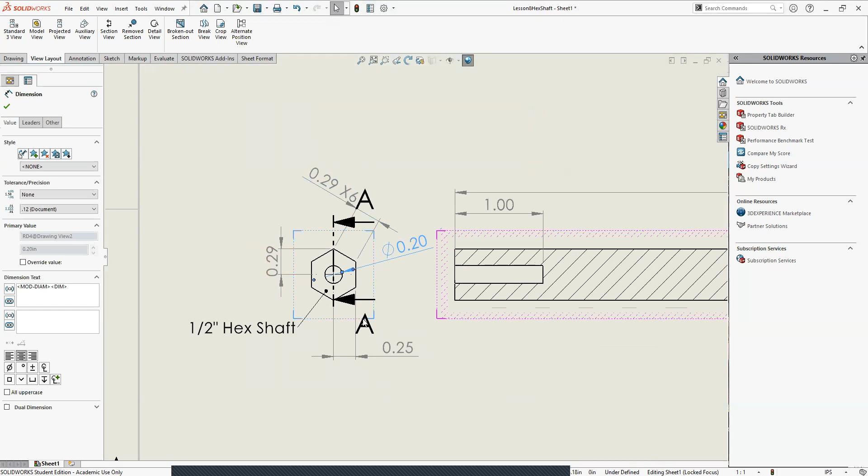I just wanted to introduce section view and give you an example of when you might use it in a drawing. So if you wanted some holes drilled in this hex shaft but weren't able to do it yourself or were busy with something else, this is kind of how I'd draw that. Although in reality, we probably wouldn't need to provide all these hex dimensions here—I just showed you them to show you them. Realistically, all you'd probably need is just the diameter of the hole. Label this as a 1/2 inch hex shaft, maybe give them one or two dimensions just so they can confirm it's a hex shaft of the right size, and then give them the information of how long you want it and how deep your hole should be. Does that make sense?

So we kind of overdid this one, but I just wanted to show you a couple things like the times 6 thing—I'll probably try to cover that next class. But yeah, that's all I had, so I'm going to save that.